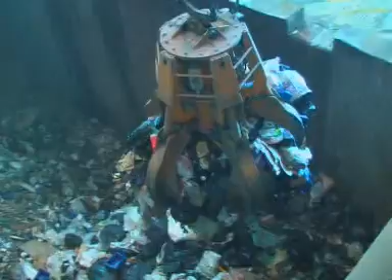The waste is tipped directly into a reinforced concrete bunker, and an overhead crane thoroughly mixes it to ensure a more consistent calorific value, enhancing the operation and performance of the plant.

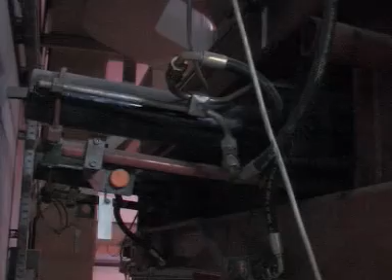The crane grab then loads the rubbish into a hopper which feeds the furnace. Hydraulic rams push the waste onto a 3-section sloping grate, which moves down at a rate controlled by the furnace operator to ensure complete combustion.

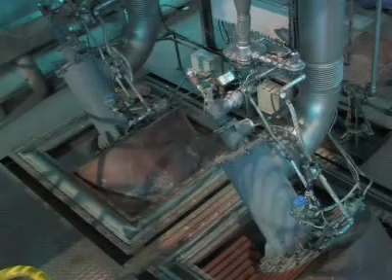The furnace runs at a temperature of approximately 1200 degrees centigrade and is fitted with oil-fired burners which cut in automatically to boost the temperature should it start to drop due to low calorific value waste.

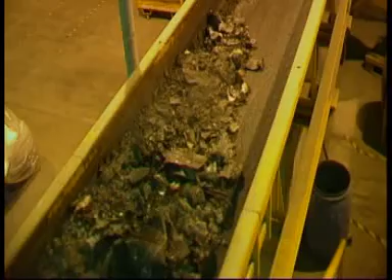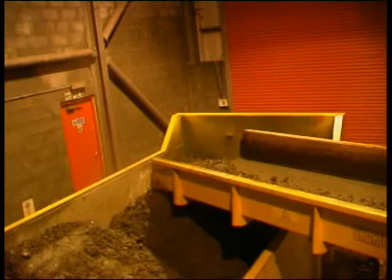Once the waste has been burned, the bottom ash, along with any metal objects from the waste, falls into a water quench which cools and prevents dust. A rotary magnet separates out the ferrous metals for recycling, and the bottom ash, which is inert and harmless, is sold for use as primary landfill cover.

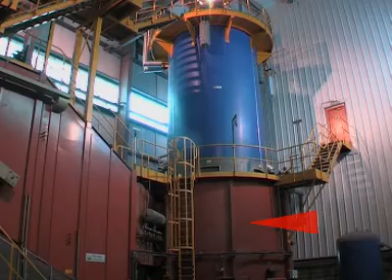Fly ash and gases from the furnace are then passed into a post-combustion chamber. Here, an induced cyclone removes the larger particulate material, and dioxins and other hazardous gases are destroyed by ensuring a temperature in excess of 850 degrees centigrade for at least 2 seconds.

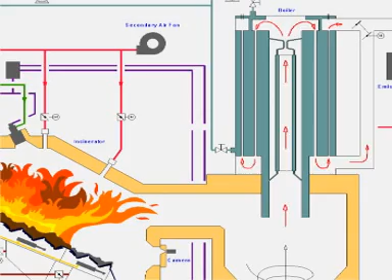The gases are then passed through a 3-pass boiler, which heats the district heating water to a temperature of 115 degrees centigrade.

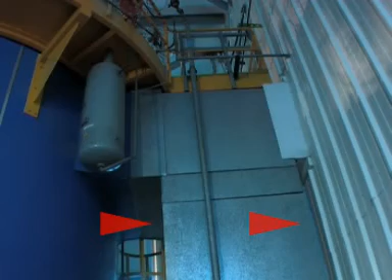The gases, now at a temperature of 180 degrees centigrade, pass into an electrostatic precipitator operating at 60,000 volts, which ionizes and removes fine particulate matter.

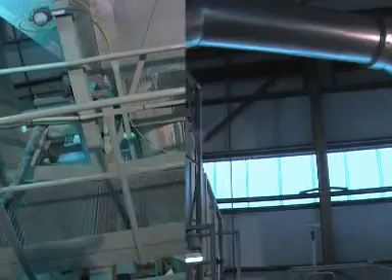Next, the gases pass into a wet scrubber, a specialized apparatus that uses a system of water and alkali sprays to absorb and neutralize acid gases.

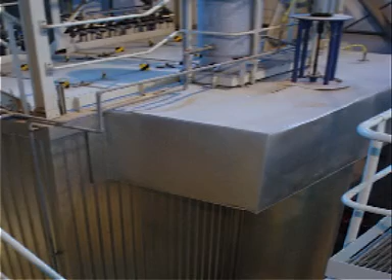Finally, in the baghouse filter, a mixture of powdered lime and carbon is used to remove the last traces of acid gases, mercury, and other pollutants, along with any dioxins which may have regenerated during the cooling process.

The cleaned flue gases are then released to the atmosphere at a temperature of around 100 degrees centigrade through a 46-meter chimney stack. Emissions are continuously monitored to meet the Waste Incineration Directive.

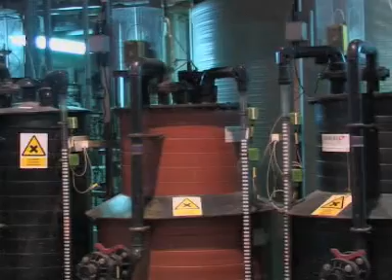The highly acidic effluent from the quench passes through a water treatment plant, where it is neutralized with lime milk and chemicals are added which cause heavy metals to precipitate out.

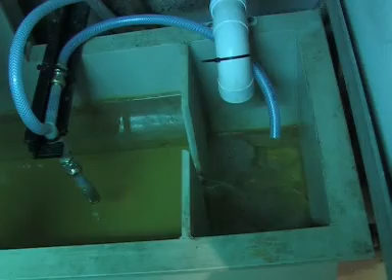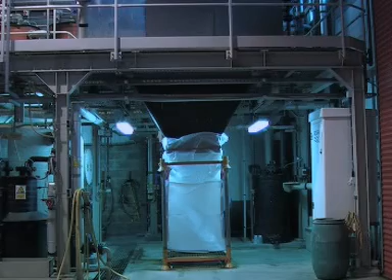Finally, we are left with clean salty water, which is discharged into the sea, and a thick, damp sludge, which must be sent away for treatment. Deposits from the post-combustion chamber, electrostatic precipitator, bag filter, and water treatment are classified as special waste and are shipped to the mainland for processing.

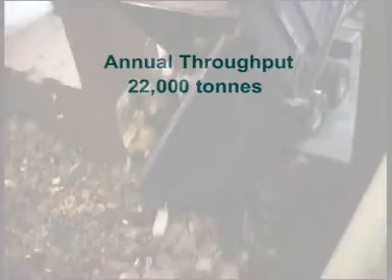Each year, the plant processes around 22,000 tons of waste. Approximately 300 tons of metal are recovered for recycling. Around 5,000 tons of bottom ash is produced, and this is used for primary landfill cover. Just over 100 tons of filter cake from the water treatment plant and 420 tons of fly ash from the bag filter and the electrostatic precipitator - that's less than 2.5% of the original waste - is sent for chemical treatment.

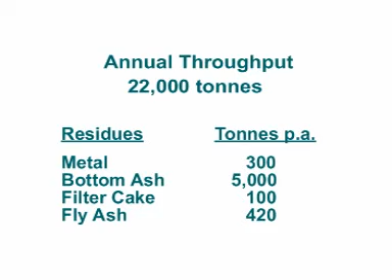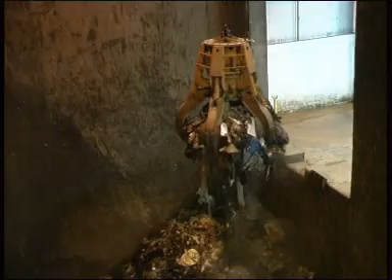The plant is designed to operate for 7,800 hours per year, on a 24-hour-a-day, 7-day-a-week basis, and on average, the plant produces 6.5 megawatts of power, enough to heat 3,500 to 4,000 average British homes.

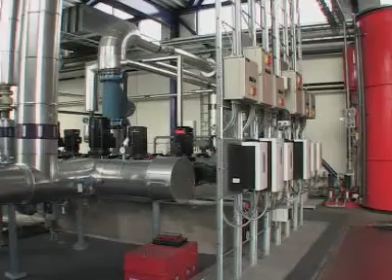The water, at a temperature of 115 degrees centigrade, is pumped approximately 2 kilometers to the district heating peak load boiler station. Here, the temperature is reduced to 95 degrees centigrade by mixing in some of the returning water from the heating network. It is then pumped around the 27 kilometers of pipes in the system, returning to the pump house at a temperature of 55 degrees centigrade.

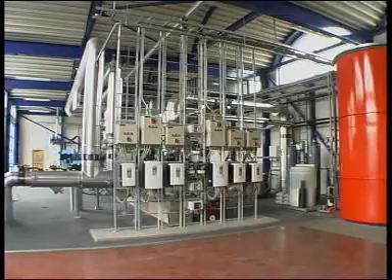The Lerwick district heating system, operated by Shetland Heat and Power Limited, now serves around 800 houses and 100 businesses and non-domestic properties, including a local leisure centre, schools, churches, and a wide variety of commercial enterprises. In fact, the scheme has become so popular that there is now a 2-year waiting list for connection to the network.

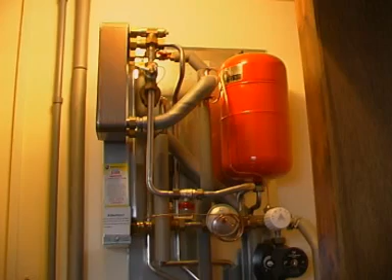Premises served by the system have their central heating boilers replaced by a simple heat exchanger. The size of the heat exchanger is tailored to the requirements of the particular premises. In the case of a domestic system, it is similar in size to the boiler it replaces. For larger consumers, however, there is a significant reduction in the amount of equipment required compared with a traditional heating system.

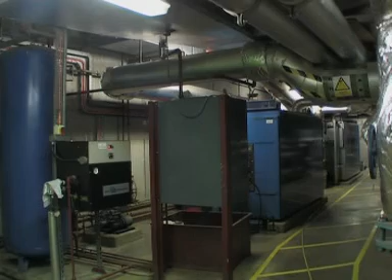Here we see the boiler room which was needed by a local leisure centre when these oil-fired boilers were used. Now, all this equipment has been made redundant by these 2 small heat exchangers.

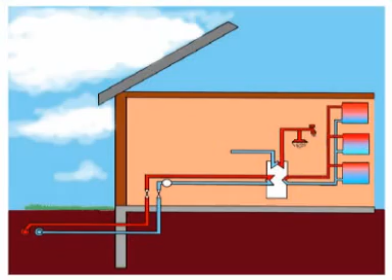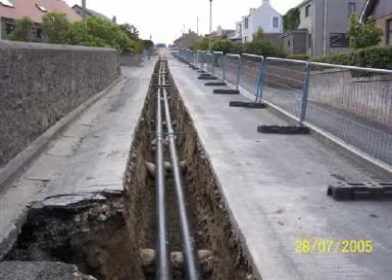Clearly, there is a significant amount of work in retrofitting a system of this type, and it is simpler and much more economic to connect up new buildings. It is not generally economic to connect up individual houses unless they are within 20 metres of the main pipes. For larger premises and housing developments, however, it is possible to extend the network.

In this new housing scheme being built in 2005, the district heating system pipes are being laid along with all the other mains services.

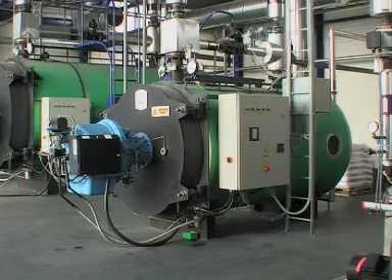At the peak load boiler station, there are 2 standby boilers, which are used when the energy from waste plant is shut down for maintenance or any other reason. These boilers are also used when severe weather causes the heating demand to exceed the output of the energy from waste plant.

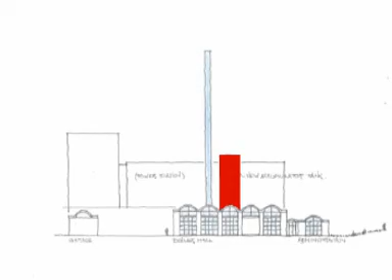Plans are, however, in hand to construct a 19-metre high, 300 tons capacity hot water storage tank. This water will be heated at off-peak times and used at times of peak demand, thus reducing the need for the oil-fired backup boilers. The success of the system is such that demand is beginning to exceed supply, so there are plans to purchase waste heat from the power station next door to the boiler station and to commission a special boiler to burn waste oil.

So there are plans to purchase waste heat from the power station next door to the boiler station and to commission a special boiler to burn waste oil.

So, to summarise, the energy from waste plant blends into its background, an industrial estate. It is adjacent to the new materials recovery facility and landfill site, forming part of an integrated system of waste management facilities. It is close to its customers in Lerwick, and it is on an A-class road.

Complex multi-stage treatment of the emissions means that they easily meet the Waste Incineration Directive standards enforced by SEPA, and there have been no pollution issues.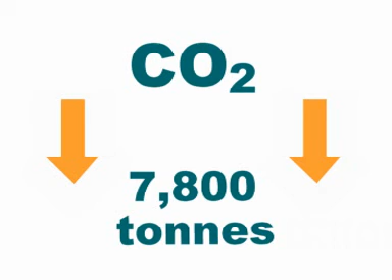Not only that, but if we consider the reduction of the use in oil-fired boilers and electrical central heating in Lerwick, this plant results in the following annual reductions in local emissions. Carbon dioxide emissions down by 7,800 tonnes. Sulfur dioxide emissions down by 500 tonnes. Nitrogen oxides emissions down by 1,000 tonnes.

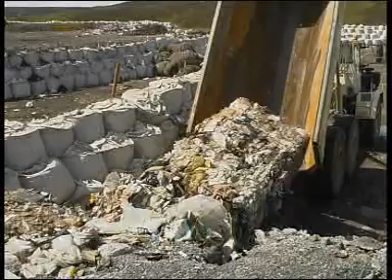Landfill is reduced by 22,000 tonnes each year. Fossil fuel imports are reduced by 2,600 tonnes. And the benefit to the local economy has been calculated at £1.5 million per year.

So, what may have originally seemed like an expensive investment now appears to be paying dividends in many different ways.